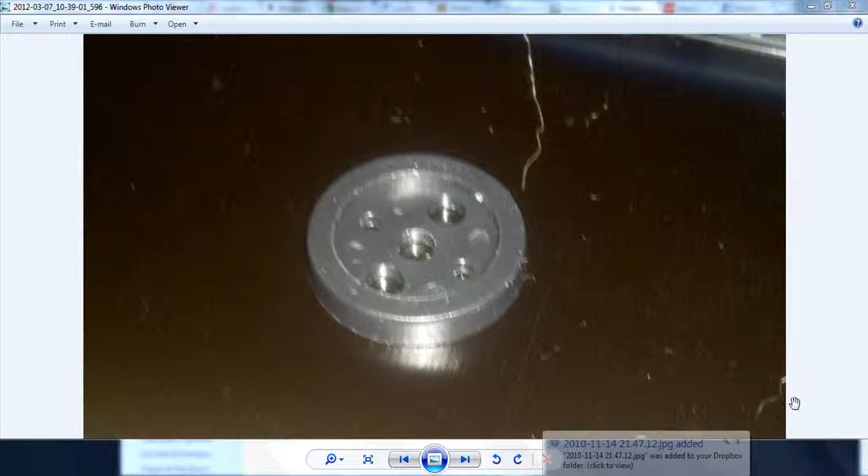Okay, so this is the next part that we'll be making. It is the retaining nut, or circle, retaining circle, for the large acrylic disc that we just made. So you can see it's not going to be too bad to make. We're going to have some circle and then another circle and then some more circles. So a lot of circles.

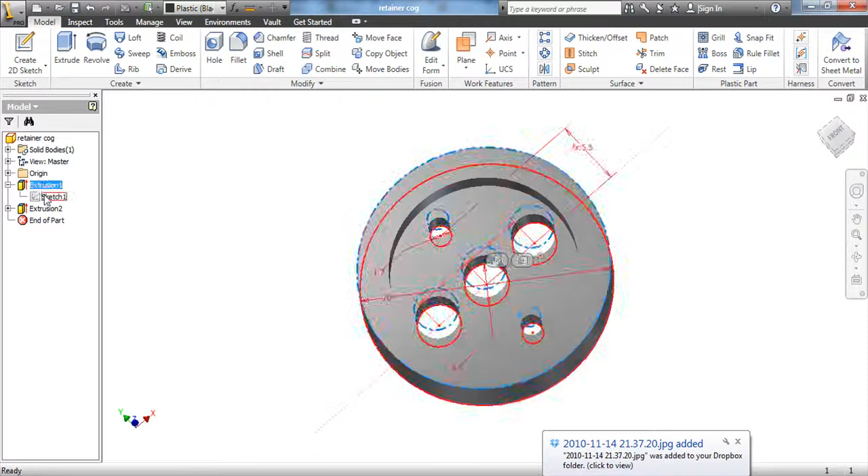So it just comes down to how we want to dimension things. So this is the part that I made, pretty straightforward. We're going to do a bunch of circles, then we'll extrude that back out, and then we'll extrude cut down into it.

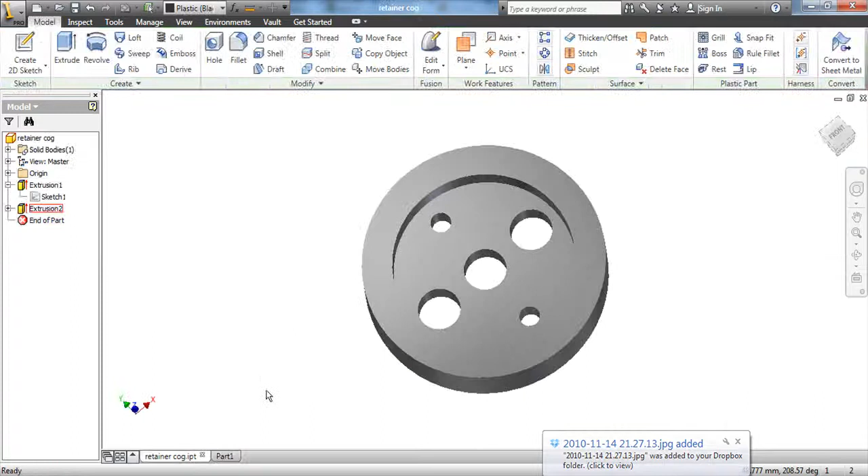So let's go ahead and make a new part. We'll go to New, Standard Millimeter.ipt part file. We'll start sketching this out. I'm going to have to bounce back a couple times to get my dimensions, so just hold on with that please.

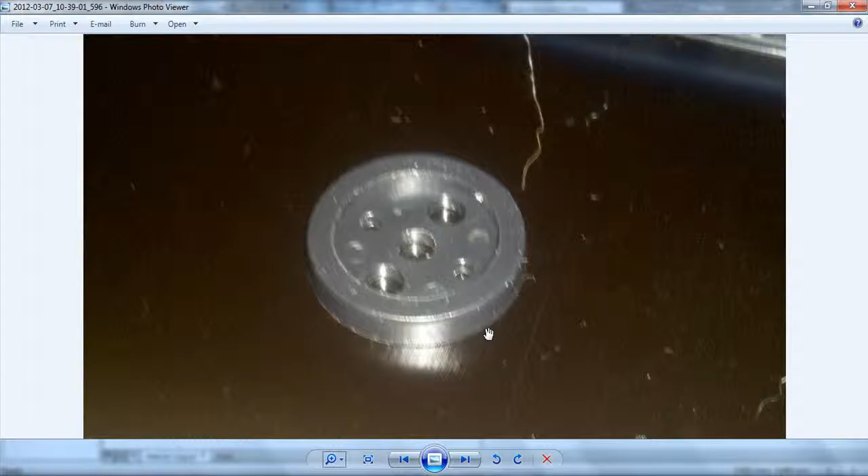So we have an outer diameter of 20 millimeters. Zoom back in, we'll do a circle across the middle, concentric with that larger circle, and we're going to make that a diameter of 3.5. And just so you know, you can use D as a shortcut command to get to dimension, so you don't always have to go up to your toolbar or into the menu. So we got that.

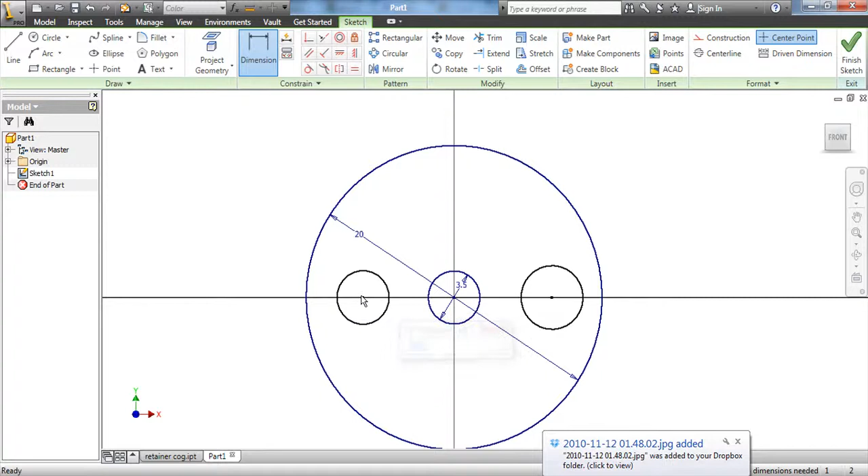We're going to make two more circles in line with this one. We're going to do a dimension from the center points of the circles, that's going to be 5 millimeters, and that's going to be 5 millimeters. And they will be made so that they are equal. So up here in the constraint toolbar, this will be equal to that, and this will be equal to that, so all three are constrained to be the same part, same dimension.

So hit escape to get out of the equal command, and we'll place two more circles. We're going to have one up here, and this dimension is going to be 1.7 millimeters, and the other one's over here. So what we can do is make a line across the center of this circle and create that as a construction line. If you click on the line and click construction, that'll turn to construction. Like I said before, that's just there for referencing and geometric purposes, it's not to be extruded out or anything, it won't be recognized for those features.

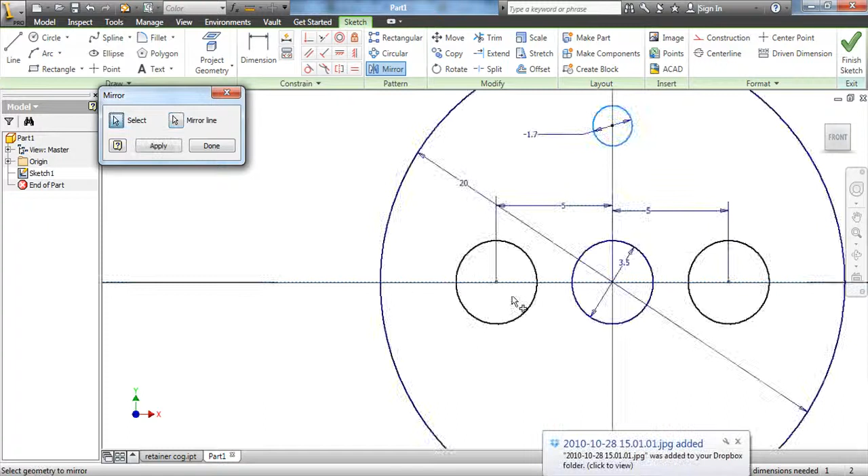And then we'll go to the mirror pattern, click on the circle for the feature, and then the mirror line is that line we just created. Click on that and then apply, you'll see it popped up over there. The nice thing about mirror is that any change in dimension to this one will update to the other one as well, and it keeps everything nice and symmetric.

Alright, so I believe I had one more dimension here though. Yeah, okay, so this one, if I remember correctly, I dimensioned this out. I had measured with the part from the outside over there. So what I did, to show off the functional abilities of the dimension command, you click on the 20, that'll show up as D0. You divide that by 2 to get a radius, and then you subtract 4.5 millimeters, which is the distance on the actual part between the center point of the circle and the edge of the part, and that gives you the 5.5. What's nice about that is if I update this to say 23, it's going to change the dimension based on this dimension, so it's always going to keep it referenced the same in scale.

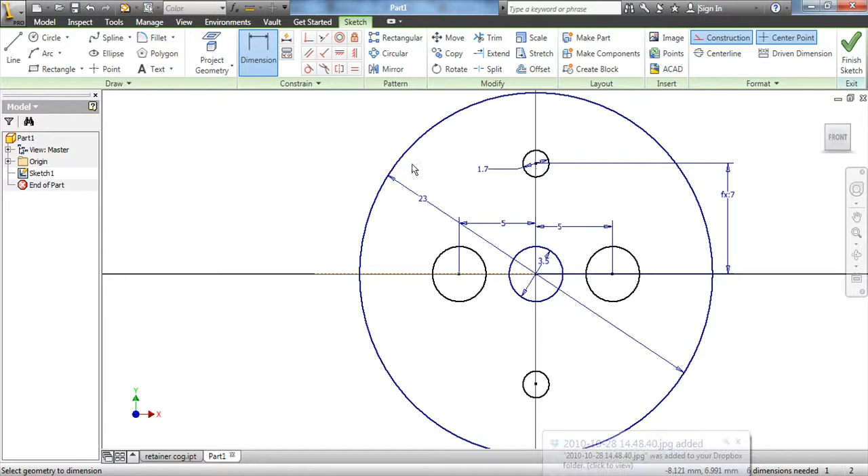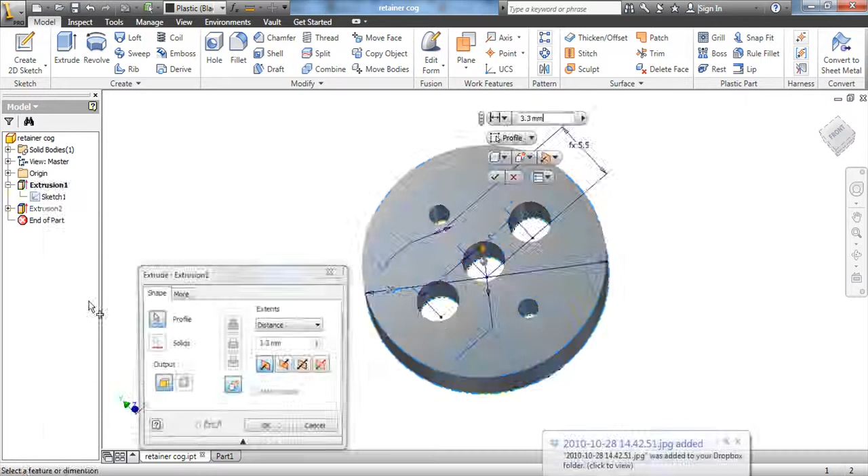So we're going to go ahead and place that there. We'll finish the sketch, and then we're going to extrude this up a distance of... let's see here. Edit feature, 3.3 millimeters, I would have never remembered that dimension. Alright, so we'll do an extrusion of 3.3 millimeters. And that finishes that part of it off.

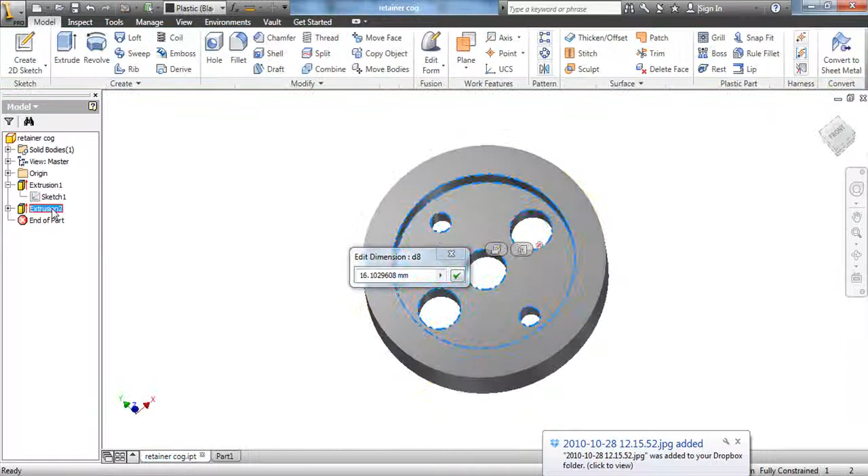The last thing we have to do is create a 2D sketch on the surface of this. All it is, is just a circle that encompasses all of this, dimensioned to I believe it's 17. Let me double check, sorry, I made this last night, not this morning. The distance between is 2.5, so I was incorrect in doing that. So we'll just delete that dimension, create a dimension between the two concentric circles, and make that dimension 2.5 millimeters. We'll finish the sketch there.

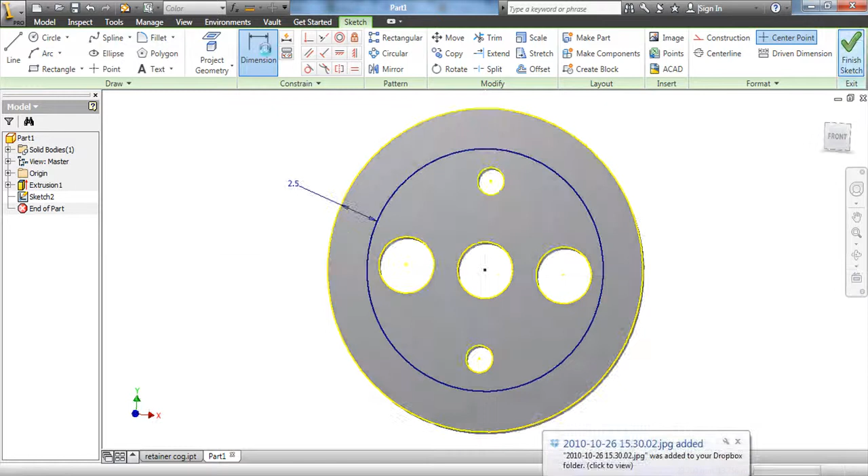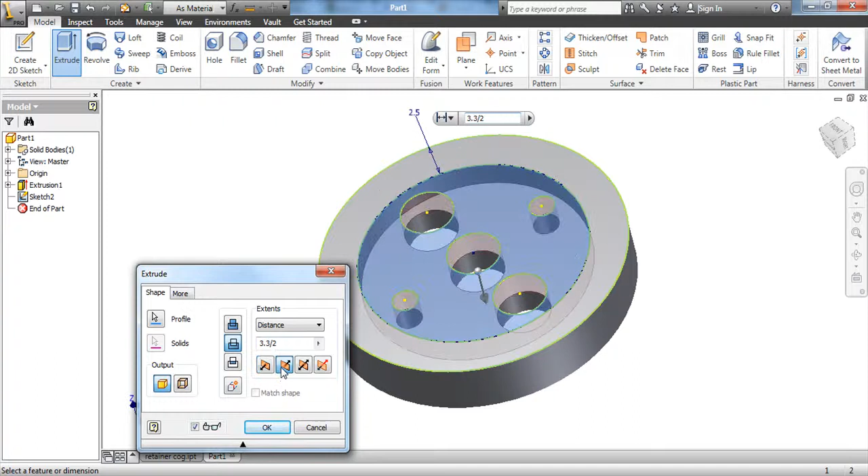Go back over here to get what the extrusion depth was, and that is 3.3 divided by 2. And again, that's just a relation that I made. And make sure to click the cut, and switch the direction so that's going into the part. And that should be all it takes for this guy right here.